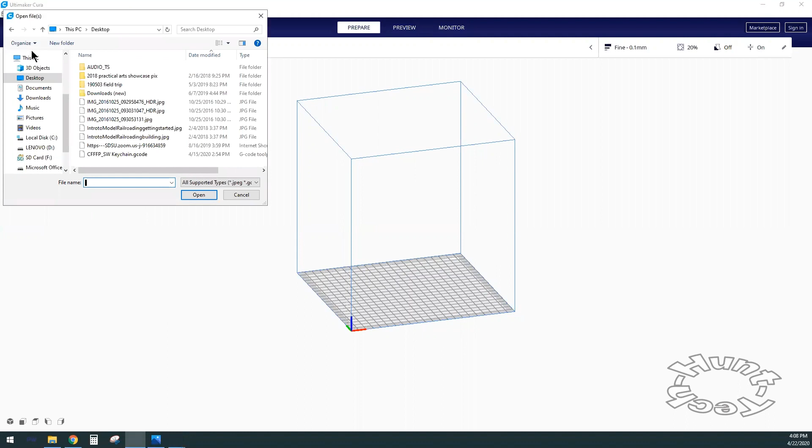Get it positioned and sized and sliced, and have a file prepped that I can then take to the 3D printer. So I'm going to click up here to open a file, and I believe that I put that STL file in the downloads folder. It's right there. Giving a file name that tells your name and what the project is, is very helpful for finding it when we get into the 3D printing part of this.

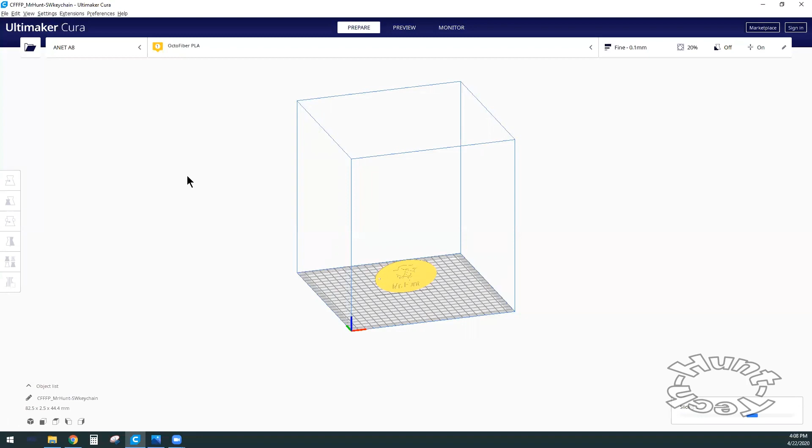So the orientation is it has this standing up on its edge, which is true. It's the representation for how we drew the part. However, that's not really going to work out too well to try to 3D print. So what we want to do is manipulate this a little further.

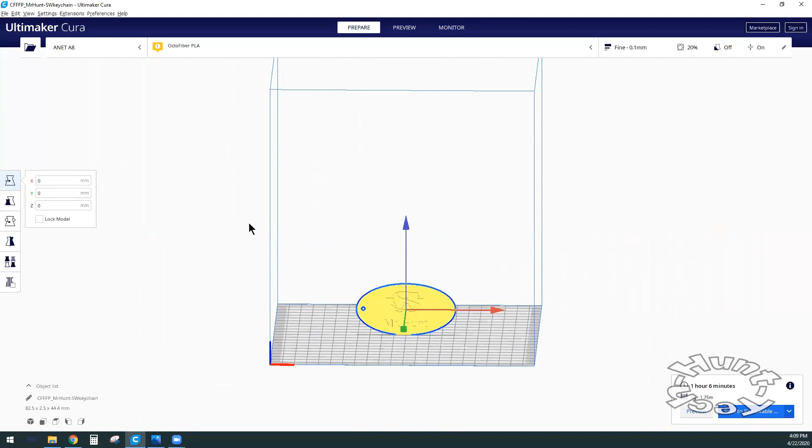The first thing I'm going to do is get in and rotate this. Each of the three axes, X, Y, and Z, has a different color. Think of it like a hoop, and you can click on it and drag and spin around the axis in the path of this hoop. So the way I want to rotate this to make it lay down, I need to spin it around the x-axis, which is this red hoop here. And I'm going to turn that - you can see the angle in degrees. I need to go 90 degrees.

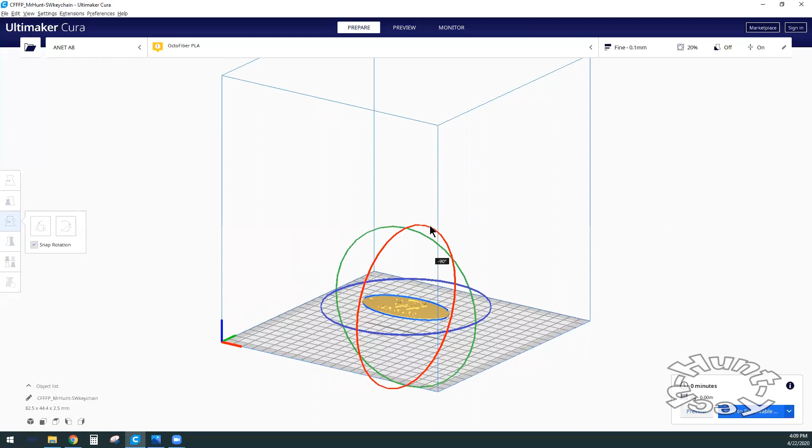When I let go, it's going to be suspended above the table surface, but it will drop. It knows that, and it's going to drop it on the table. And you saw it come down.

It's slicing it, and it says it's going to take 53 minutes. Ideally, for our purposes, we want something that's going to be 20 to 25 minutes. A 53-minute print job just causes a backlog if we're doing these one at a time. I have a couple options here, but they all involve somehow changing the shape of this and making it smaller.

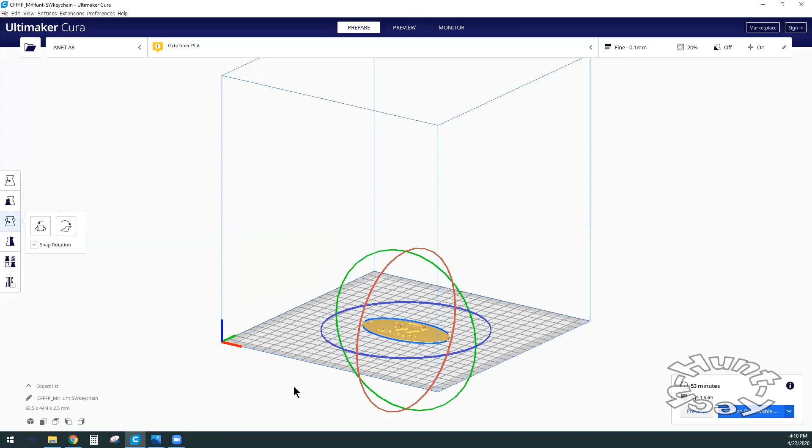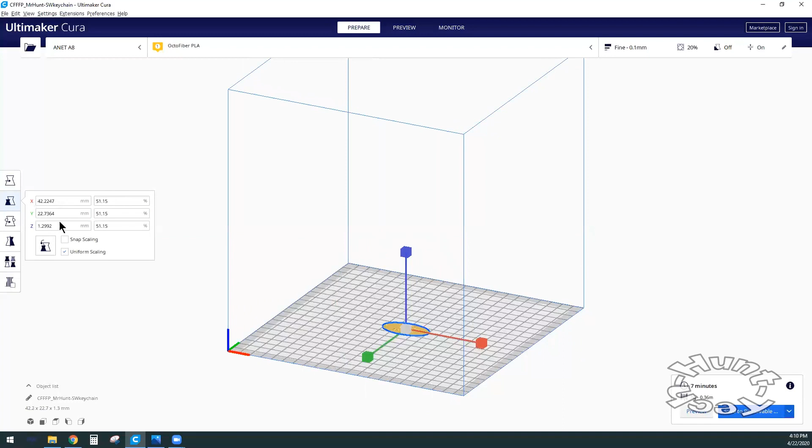So to resize this, I'm going to scale this, and I can drag these handles, which may be good for getting started and doing kind of a crude, rough start with it. However, I can also type in numbers here - I can go percent of original size, or I can put an absolute number in millimeters. Every time I make an adjustment, it reslices it.

I've made this thing so small that it's a 7-minute print job now. I might experiment with this a little bit and get this to where I can get it in the 20-minute range. So 42 millimeters, let's try 65. And it will proportionally rescale everything in the other two axes when you type in a number, either for percentage or for the absolute size. I've got a print job that's going to take 26 minutes, just guessing off the 65 millimeters.

And that's fine, I can do that. Now, we use 0.05 inches for the thickness of everything. If you use differing numbers, and maybe the base was going to be overly thick or something, one of the things you could do is turn off uniform scaling, and I could independently alter the z-axis. So like in this case, instead of 2 millimeters thick, I could make it 3 millimeters thick.

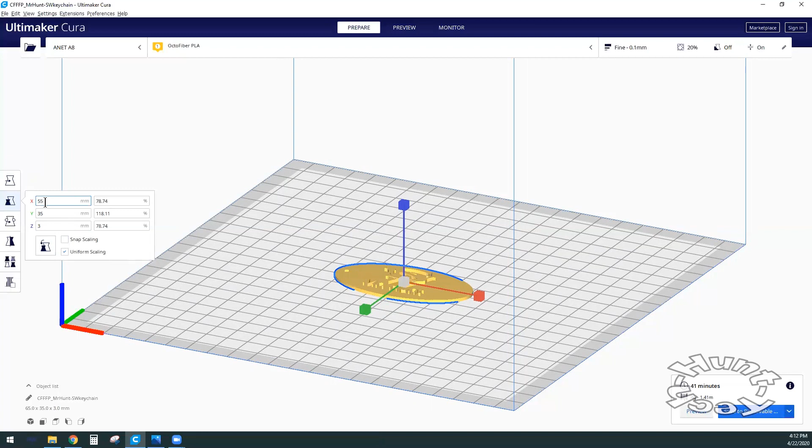When I did that, you saw the change here, but the other two axes did not change at all. And that puts me up to a 41-minute print job. Well, I can turn the uniform scaling back on and maintain all the proportions, and I can leave that thicker with relation to the rest of it and make it maybe 55 millimeters to reduce the size a little bit.

Now when I do that, the thickness drops off. Oh, I can put that back up a little thicker. And back at 26 minutes, let's get a little lower than that. Let's go to 48 millimeters, and turn off uniform scaling and put that back to 3 millimeters, and see what happens to the slicing time. That's a 24-minute print job.

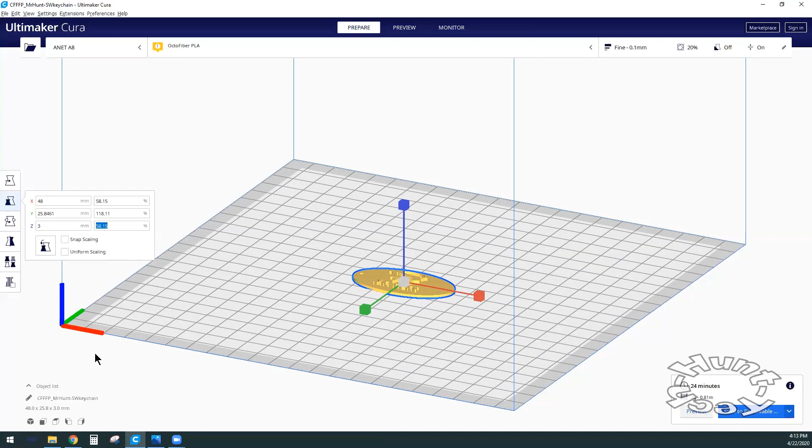With it being thicker, there's going to be no mistake about the detail on those raised parts. Quite honestly, that's raised up a little bit more than what's going to be needed for the kind of print that we want to do. I wanted to demonstrate that, but I'm going to go ahead and put that back, and then back to my 26-minute print job. So it's going to use about 1 meter of filament that weighs about 3 grams.

All right, at this point I am ready to export this file, save to removable, which is card F, which is in the SD card slot in the front of the machine. File is saved, and it says it is okay to eject hardware.

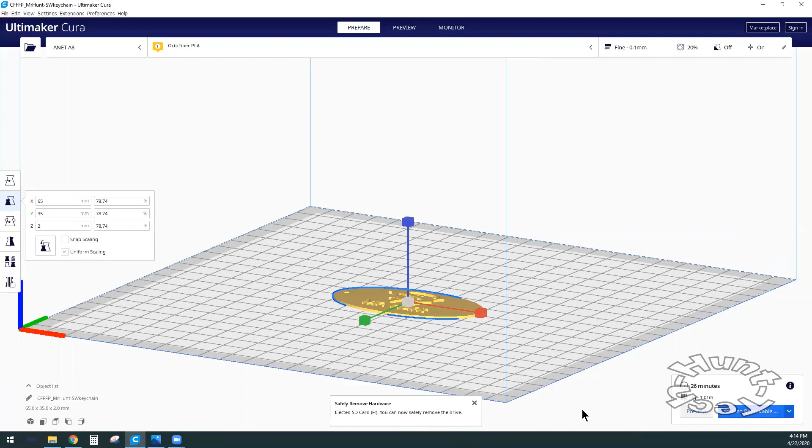For our next video, we're going to go over to the 3D printer, and we're going to actually print this job.